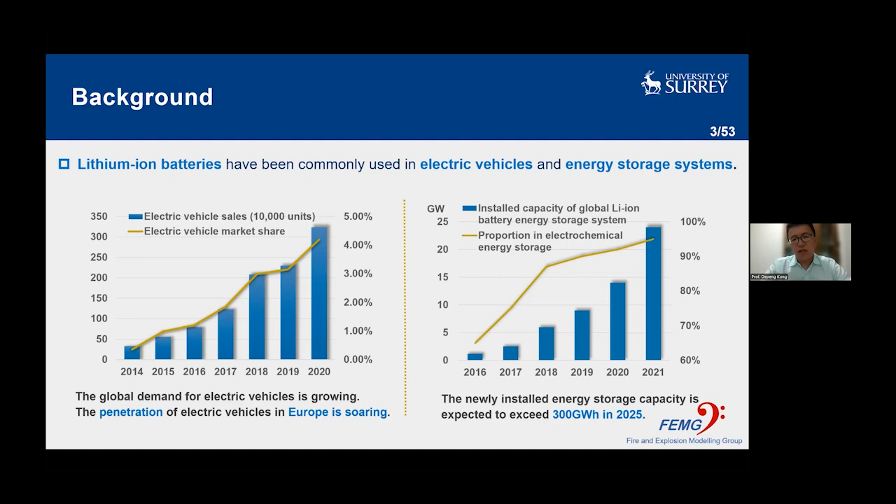However, the safety issues related to lithium batteries are an important part that we cannot ignore. For example, there are some fire and explosion accidents that occur from time to time. Here we give some examples.

For example, for the very famous electric vehicle brand Tesla, the Model S caught fire when it was plugged in at a supercharger station, and the Model S was totally destroyed during the fire. Another accident occurred in Australia in an energy storage station. Because the energy storage station usually uses a lot of lithium batteries, the fire was very large and lasted about 4 days and 4 nights.

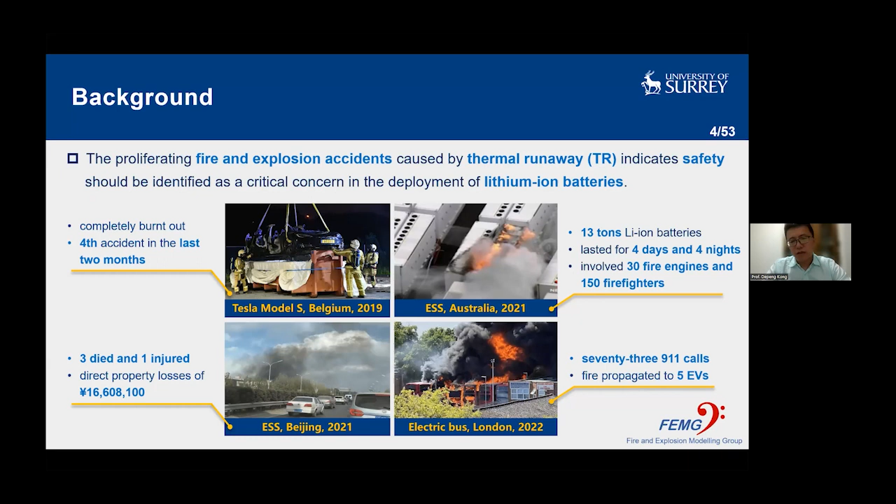It was in an abused condition. For example, if the battery suffers mechanical damage, overheating, or overcharge, it will generate more heat than it can dissipate. As a result, the heat will accumulate and lead to thermal runaway.

Usually, if the lithium battery undergoes thermal runaway, it will experience the process of gas generation, venting, and also jet fire after the thermal runaway. For the venting and fire behaviors, there are two characteristics. First, during the venting process, a large amount of combustible components such as hydrogen, CO, methane, and electrolyte vapor will be released. For the fire behaviors, a large amount of heat will be released from the electrochemical reactions and also the combustion.

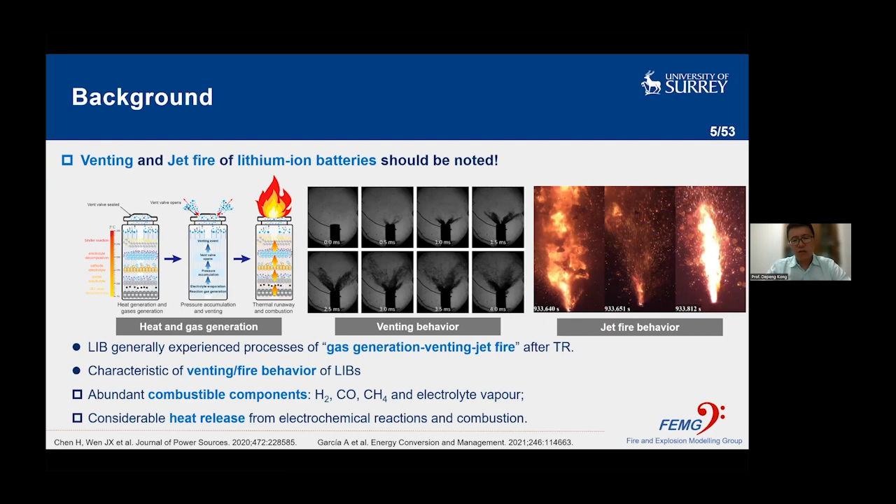Usually, the battery is used in the form of a battery pack or battery module. The heat radiation from a fire will usually accelerate thermal runaway propagation in the battery pack, and the flame of the fire can ignite other components of the pack, causing a more severe consequence. In order to prevent fire, we have to understand the mechanism of thermal runaway and fires.

There are two ways for this goal. First, we can do some experiments. But thermal runaway experiments are very expensive, and they are usually dangerous to the operators. So it is necessary to develop a numerical model to replace the dangerous and expensive thermal runaway tests.

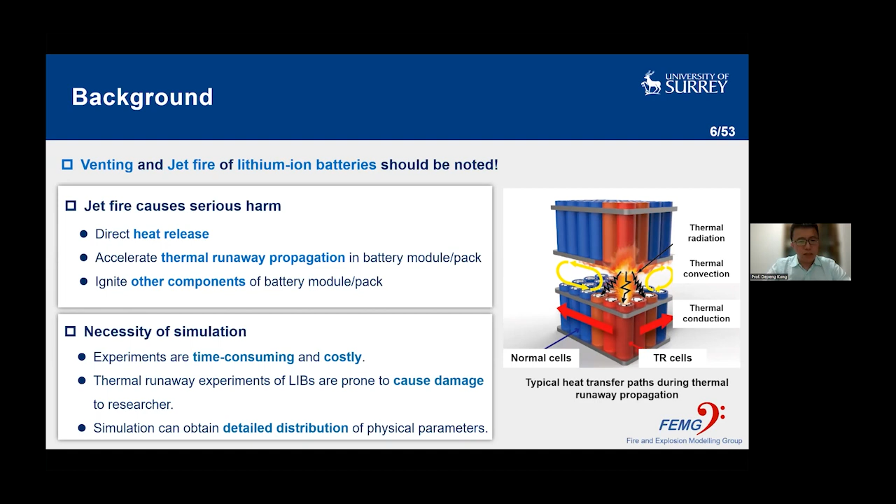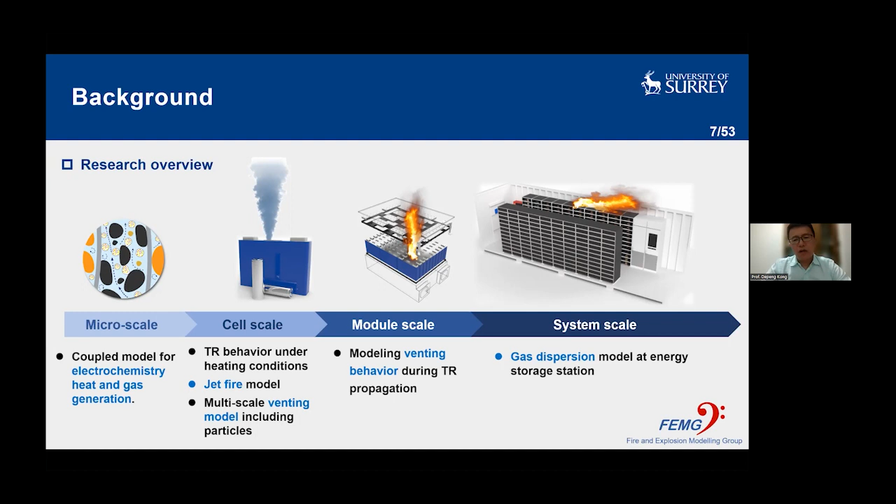In order to achieve this goal, we have developed models to predict thermal runaway behaviors and related safety issues. This model covers from the micro scale, mainly about heat and gas generation, to the cell scale, to predict thermal runaway behaviors, jet fire, and the venting process. We also extend our model to the module scale or even the system scale to predict the gas dispersion process.

Now let's see the first model, that is to predict the thermal runaway under local heating conditions. As we know, thermal abuse is one of the most direct factors, and heating is very common. However, previous work usually focused on oven tests that represent conditions of high ambient temperature with uniform temperature distribution.

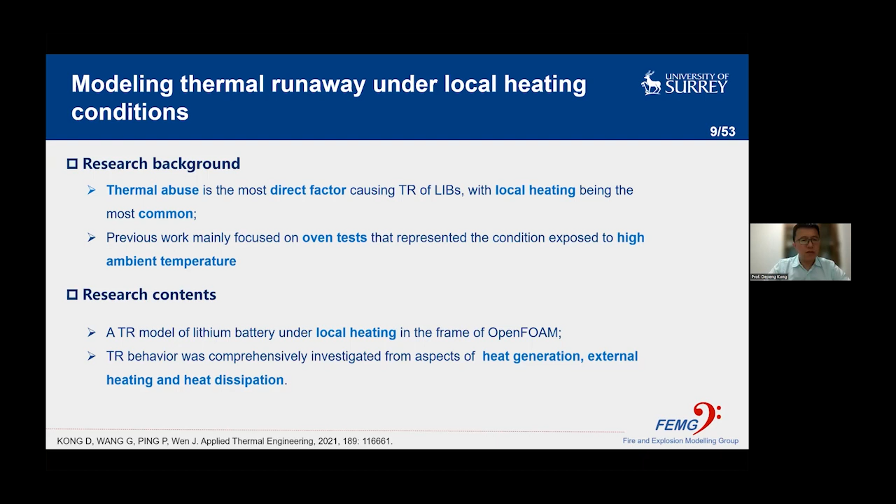In our work, we use the framework of OpenFOAM to develop a thermal runaway model to predict thermal runaway behaviors under local heating. We also use this model to investigate the influence of different factors, such as heat generation, external heating, and heat dissipation conditions.

Here is the model framework. In this model, we use the three-dimension energy conservation equations to get the temperature field for the battery. We also use the lumped model, an Arrhenius equation, to describe the exothermic reactions inside the battery.

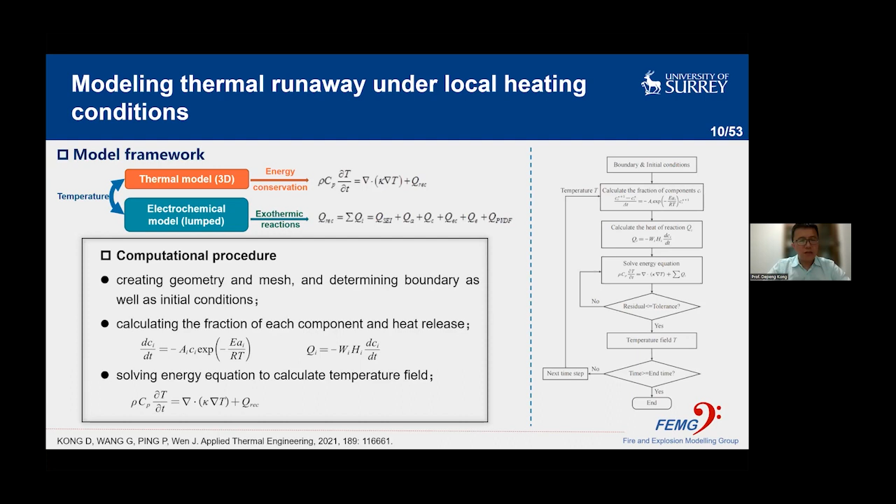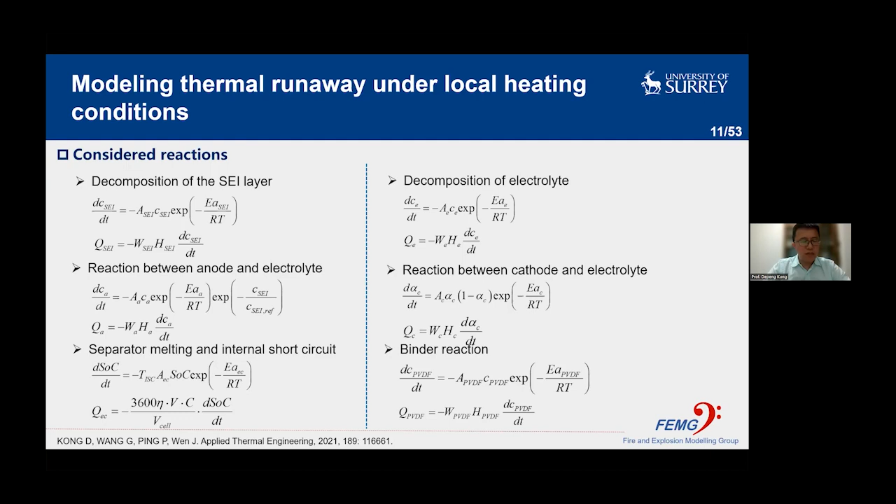For the thermal runaway of the battery cell, the main source of heat generation is from reactions among the battery materials. Here we consider 6 reactions: decomposition of the SEI layer, electrolyte decomposition, reactions among the battery materials such as anode, cathode, and electrolyte, the binder reaction, as well as the separator melting process.

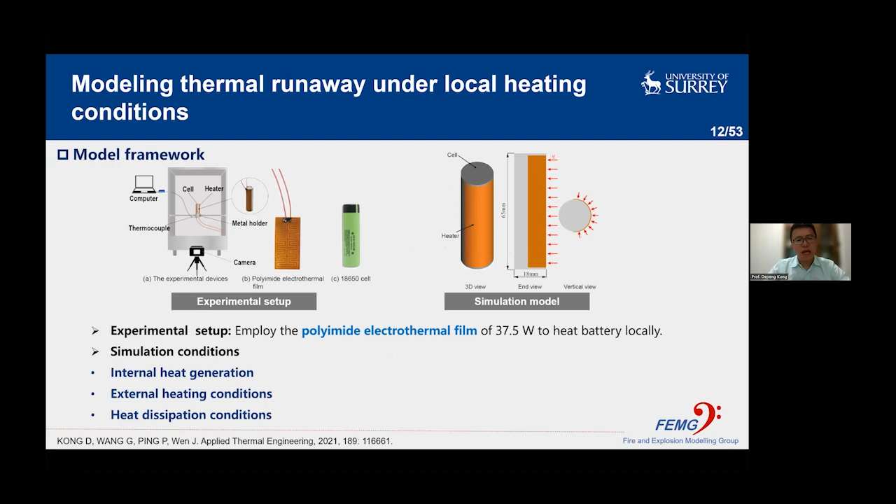Before using the model to make new simulations, we also conducted tests to validate this model. Here we use 3 different kinds of cells for the validation: the LCO cell, NCA cell, and LFP cell. From the results, we can see that our model makes a good prediction of the peak temperature and the onset time of thermal runaway.

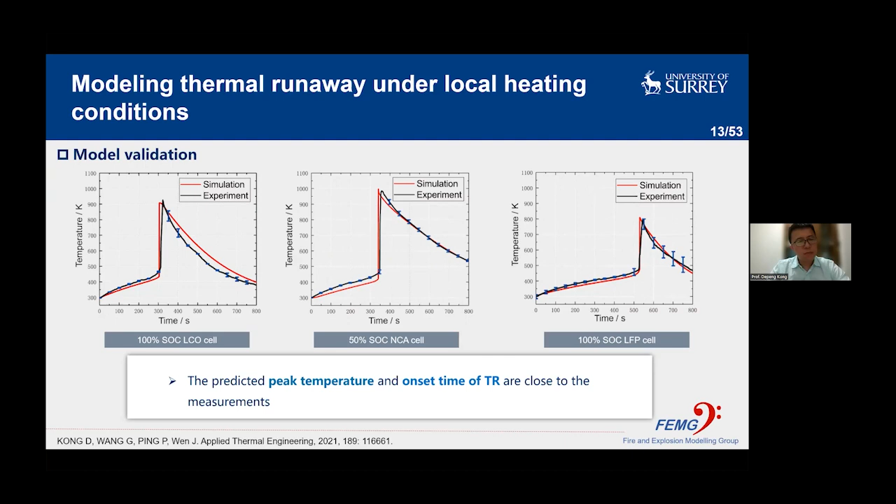After validation, we use the model to investigate the influence of different factors on thermal runaway behavior. The first factor we considered is the battery materials. Here we define 2 indicators to characterize thermal runaway behavior: the first is thermal stability, the onset time of thermal runaway, and the other is thermal safety, the peak temperature of thermal runaway.

From the results, we find that LTO anodes show better thermal safety and stability than graphite anodes. For the cathode materials, LFP shows the best thermal safety and thermal stability. We also find that if we increase the melting point of the separator, the thermal stability of the battery can be improved. The results also suggest that for electrolytes, there is limited effect on thermal safety and thermal stability.

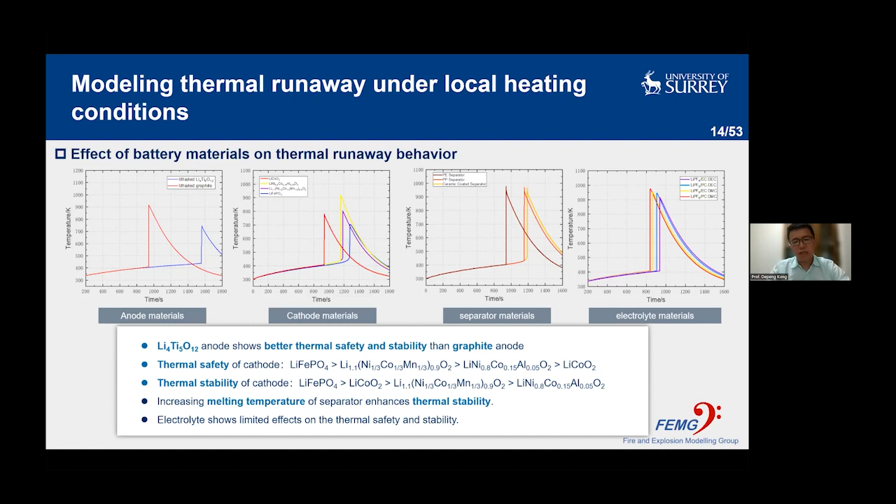The second factor we considered is the local heating position. Here we consider 3 different heating positions: heating at the middle, the end, and the bottom of the battery. The results reveal that thermal runaway occurrence probability is higher if we heat the battery near the bottom, possibly due to the uneven temperature distribution causing poor heat dissipation.

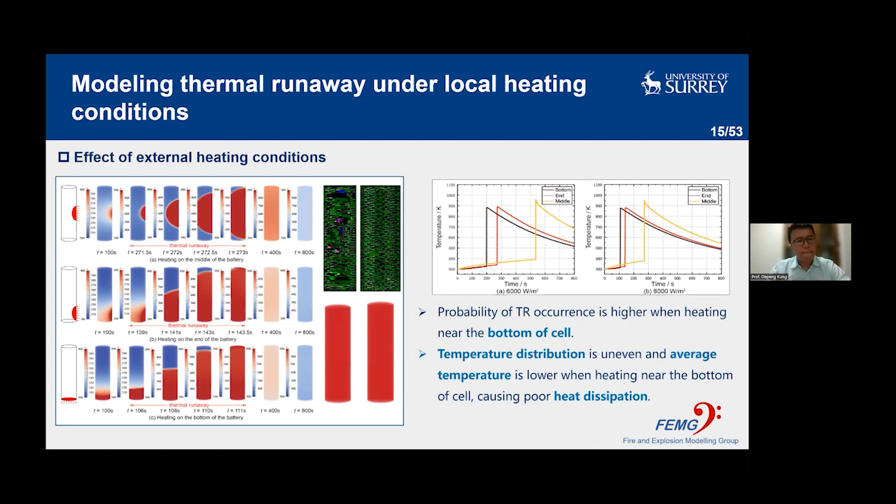The last factor, heat dissipation conditions, is very important for improving the safety of the battery. Here we consider 2 measures for heat dissipation conditions: the first is air speed, the other is ambient temperature.

From the results, we found that if we increase the air speed or reduce the ambient temperature, both can delay the onset time of thermal runaway. If the air speed is large enough or the ambient temperature difference is large enough, these two measures can even inhibit thermal runaway. However, both have little influence on reducing the peak temperature, so both are only effective in improving thermal stability.

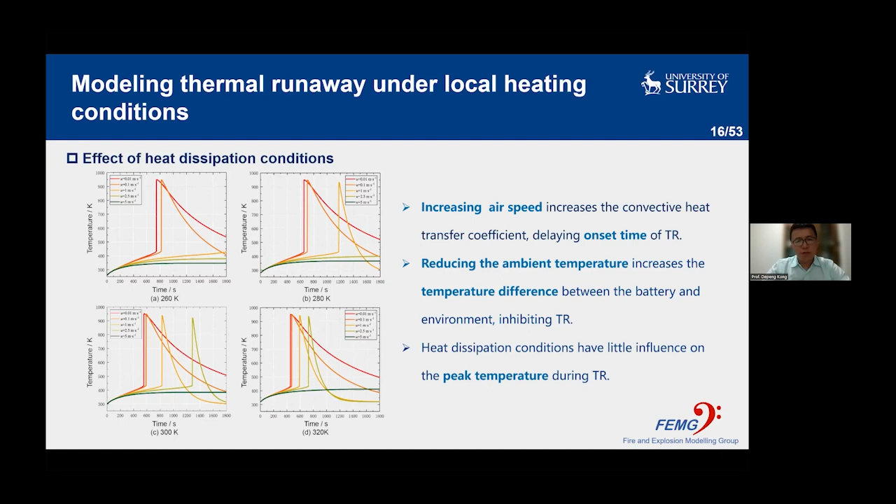The second model is about predicting the particle and gas venting during the thermal runaway. As we know, during the thermal runaway, the venting process is very important.

During the venting process, some combustible gases such as hydrogen, CO, and methane will be released from the broken safety valve. In addition to the combustible gases, some solid particles such as melting materials are also ejected. Because the solid particles usually have a very high temperature and also a very high velocity, these solid particles may serve as a medium for igniting the gases and lead to fire propagation.

However, in previous studies about the venting process, they usually considered the gas venting and neglected to focus on the solid particle venting process.

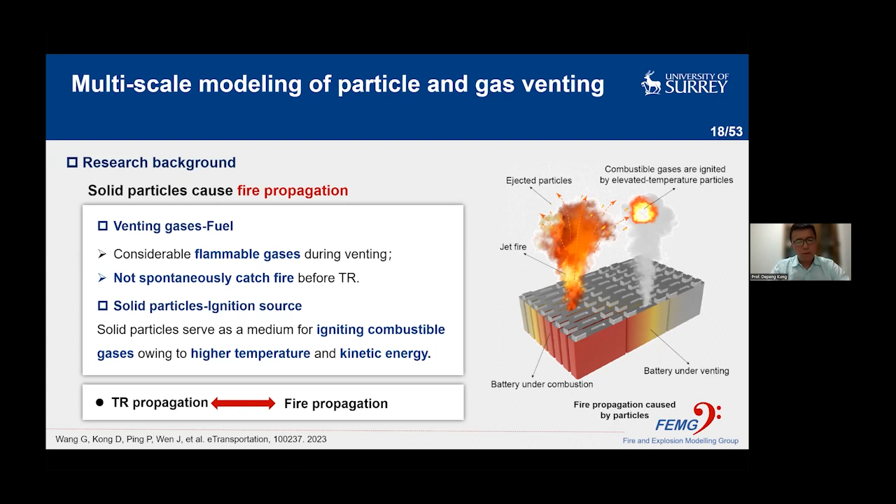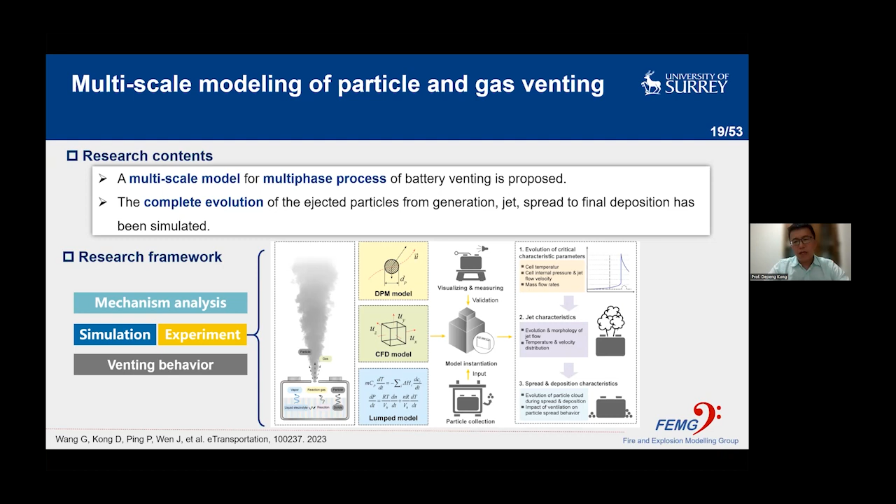In our work, we have proposed a multi-scale model for the gas and particle venting process. This model can reveal the complete evolution of the ejected particles, from their generation, jet, spread, to the final deposition - the whole process.

Before we develop the mechanism of the lithium battery venting process, the venting process is actually very complex. It is a combined action of chemical reactions and also physical transformation.

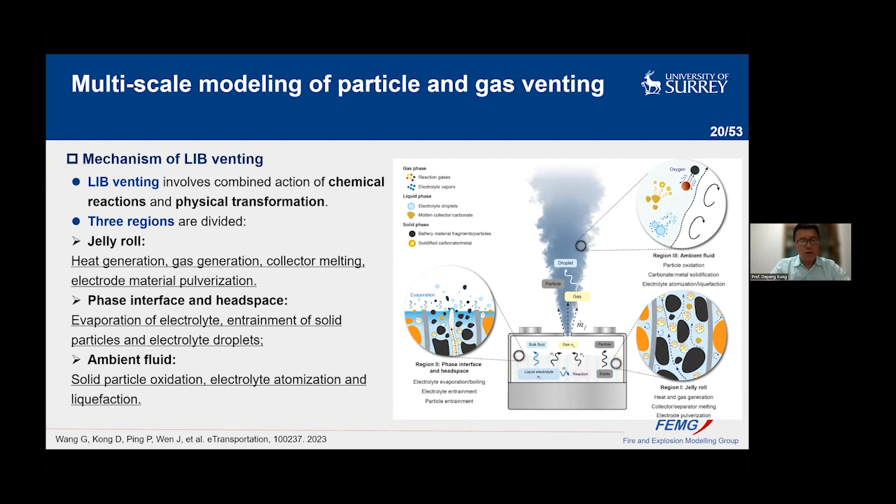Here, we divide the simulation into 3 regions: the jelly roll, which is inside of the battery; the phase interface and headspace region, which is also inside of the battery, above the jelly roll region; and the ambient fluid, which is outside the battery.

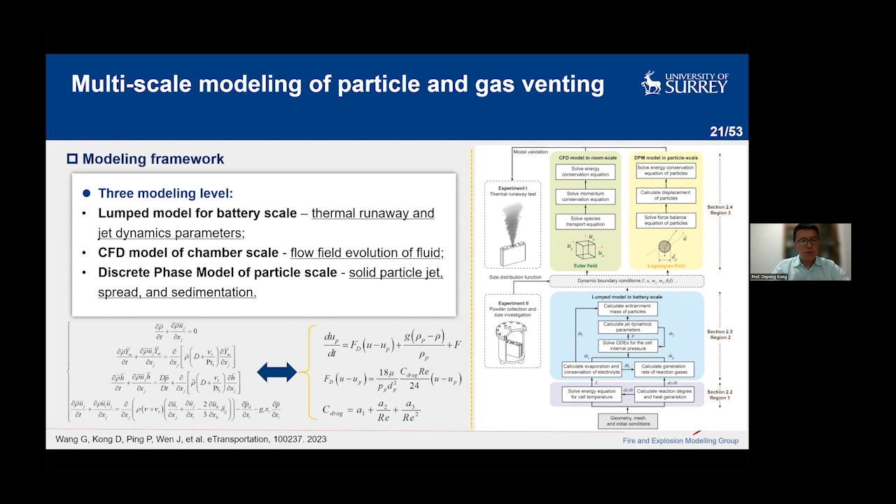Then we consider 3 levels for the modeling. For the battery scale, we use a lumped model to predict the thermal runaway and jet dynamics parameters. At the chamber scale, we use a CFD model to predict the fluid flow evolution outside the battery. And we also use a DPM model at the particle scale to predict the solid particle jet spread and sedimentation process.

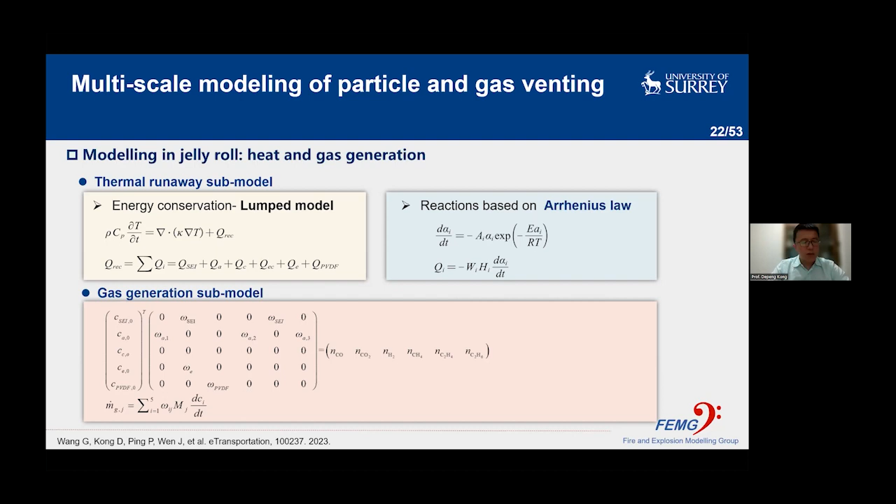Let's see the modeling at the jelly roll region. In this region, the main contribution to the venting and thermal runaway process is that it will generate heat and gas. So we use the Arrhenius equation to describe the thermal runaway progress. In addition to the heat generation, this process also generates some gases, and we use a matrix to describe the gas generation for every reaction.

For the phase interface and headspace region, there are 2 processes that we have to consider. The first one is the evaporation, and also the particle entrainment. For the electrolytes, we consider the phase change: the first one is the reaction consumption, and the other one is the electrolyte vaporization process.

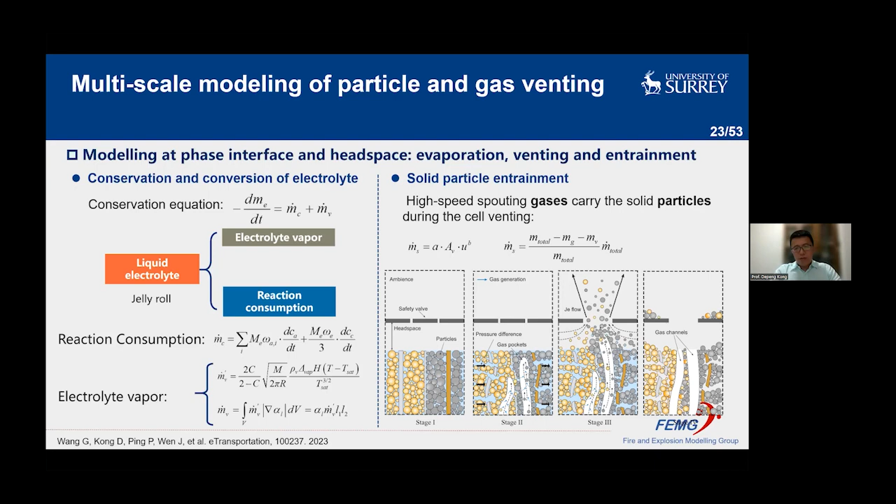For the solid particle entrainment, we consider this process as gases carrying the solid particles during cell venting.

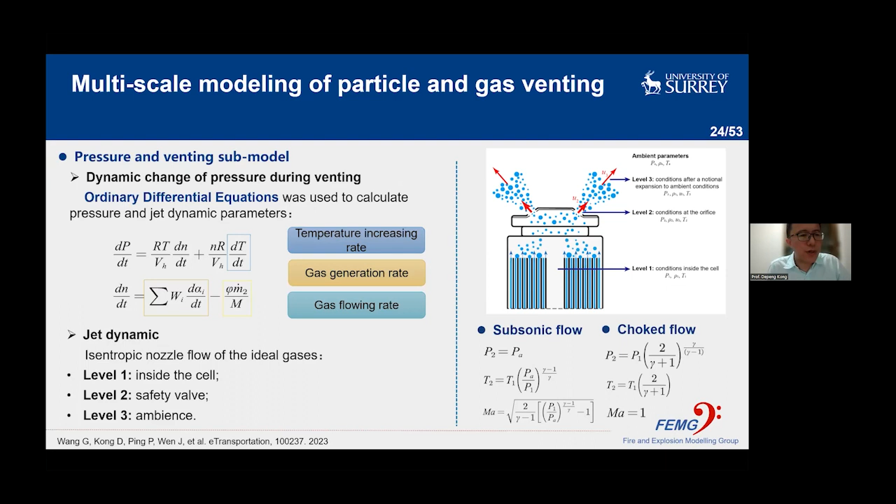After the particles and gas are ejected out of the battery, we have to consider the change of pressure in the venting process. So we use ordinary differential equations to calculate the pressure and jet dynamic parameter changes.

For the ambient region, we usually consider the gas flow and particle transport. For the gas phase model, we use a CFD model based on the FVM method to predict the gas flow fluid. And for the solid phase particles, we use a DPM model to predict the motion trajectory of the particles.

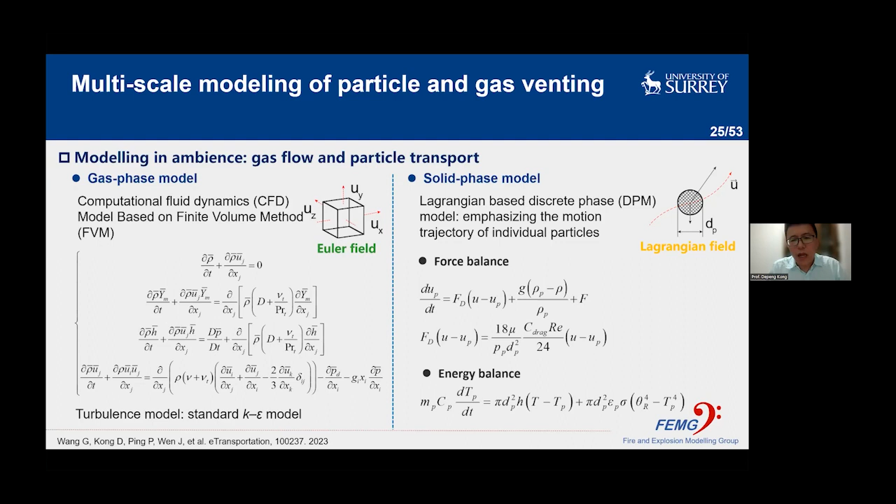We also made some tests to validate our model. Here we use PLS to visualize the ejected particles and gas flow. We also measured the mass loss and jet velocity using an electronic balance and a pitot tube.

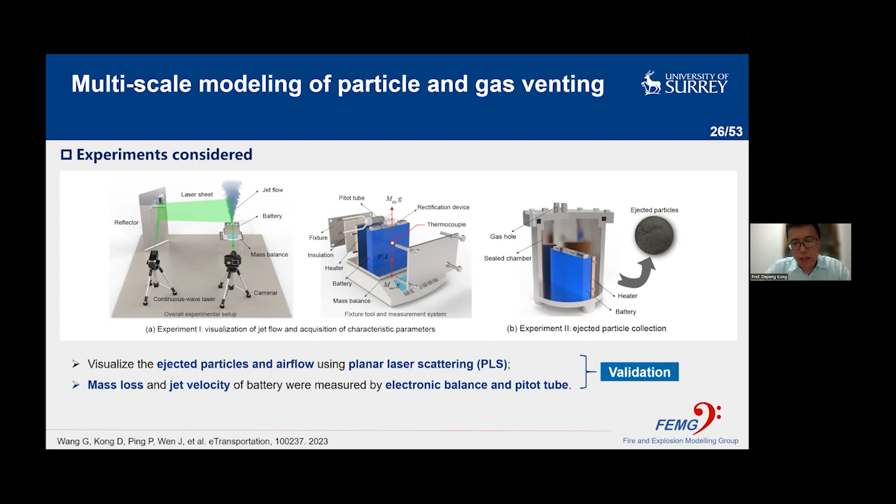In addition to these measurements, we also used SEM to observe the surface of the particles and made a statistical analysis for the size distribution of the solid particles. We found that there are two peaks for the size distribution.

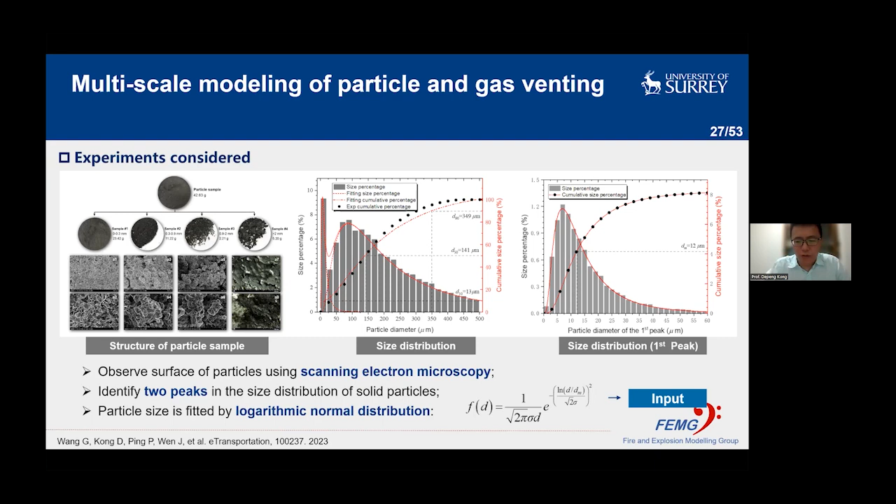Then we used log-normal distribution functions to fit the particle size, and the fitted function was used as the input of the model. Here are the simulation and boundary conditions for our model.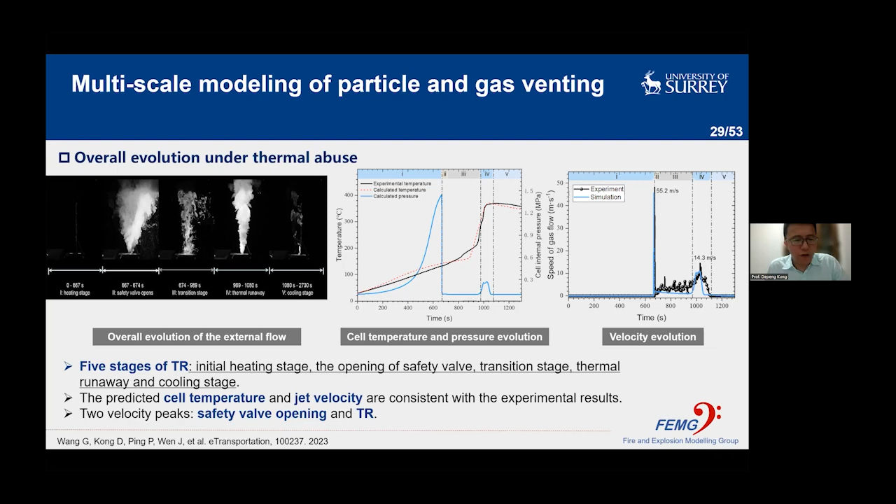Then we compared the results from the tests and also from the simulation. From the results, we can see that the predicted cell temperature and also the jet velocity are consistent with the test results. In addition, this model can also identify two velocity peaks that occur at the safety valve opening and also during the thermal runaway progress.

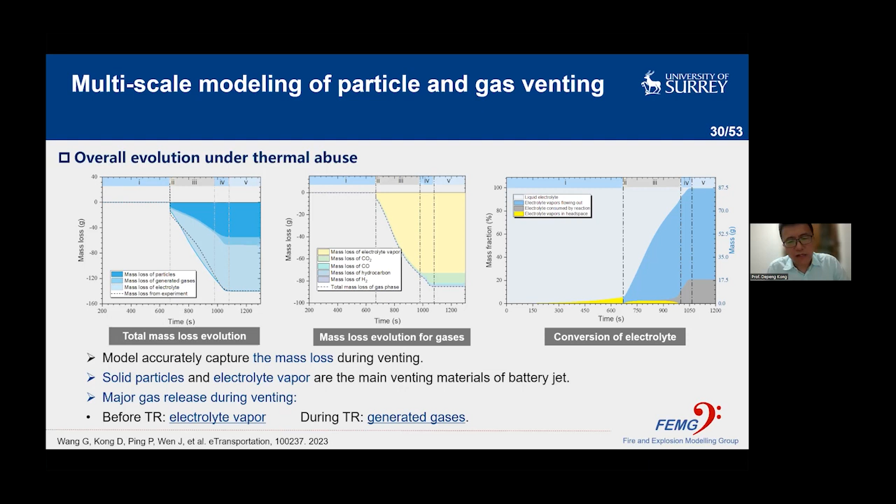This model can also reveal the mass loss evolution. From the results, we found that the solid particles and the electrolyte vapor are the main venting materials of the battery jet. We also found that the major gas release during venting is different before and during thermal runaway. Before thermal runaway, the main component is electrolyte vapor, and during thermal runaway, it is the generated gas due to the reactions.

We also compared the jet geometry characteristics, comparing the angle of the jet and also the radius of the jet. From the comparison, we found that the predicted angle and radius are consistent with the experimental results.

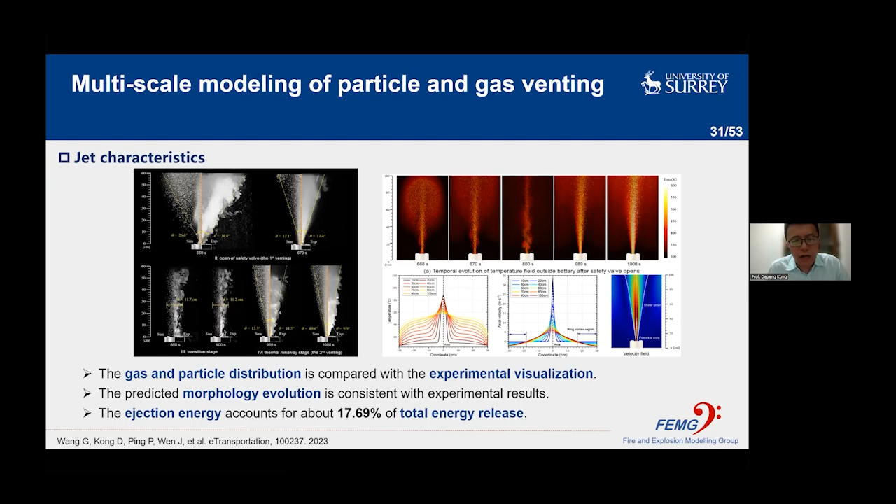This model can also be used to predict the spread and deposition of the generated particles. We also used this model to investigate the influence of ventilation on the particle mass. From this, we can see that the proposed model can reveal the entire chain of the venting phenomena, from the jet spread to the final deposition.

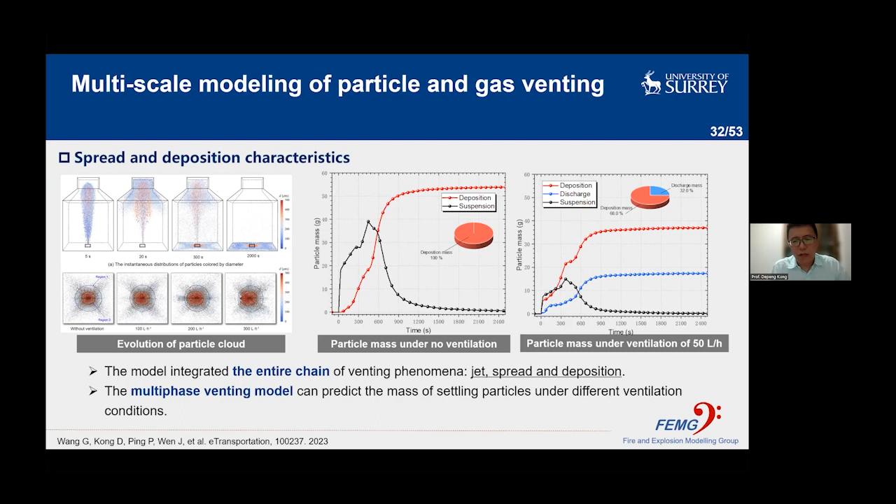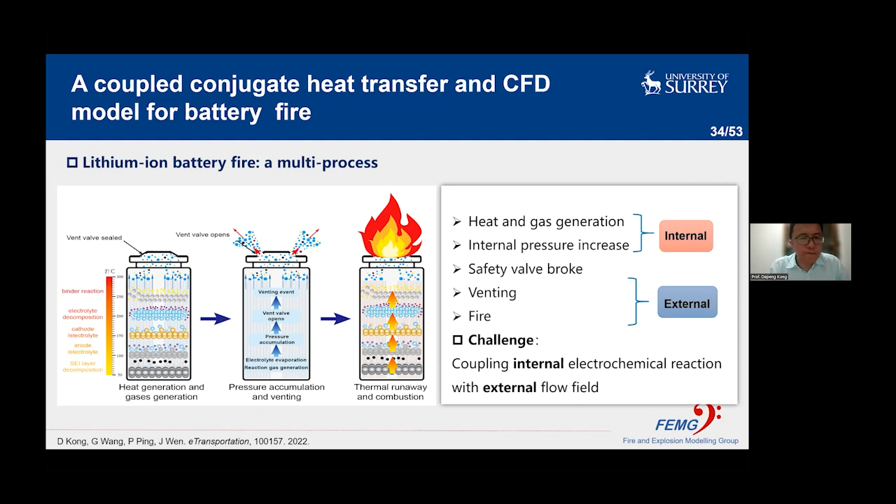The third model we developed is a model to predict the jet fire of the battery. The battery fire is very different from hydrocarbon fuel fire, because the causes of the fire are usually related to the internal electrochemical reactions inside the battery, and outside the battery there is also a flow field. So if we want to model the battery fire, we have to couple the internal electrochemical reactions with the external flow field. Here we developed a model based on solid and fluid heat transfer.

This model includes several sub-models. The first is the thermal runaway model, which uses a series of Arrhenius equations to predict thermal runaway. We also use ODEs, ordinary differential equations, to predict the pressure and venting process. For the outside of the battery, we use the RANS model to describe the turbulence process, and the EDC model to describe the combustion. In order to couple these models, we use dynamic boundary conditions to accompany them.

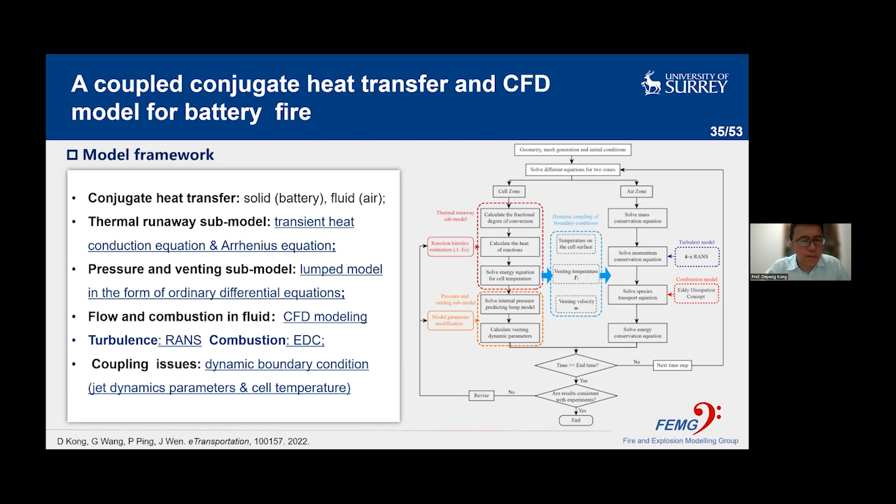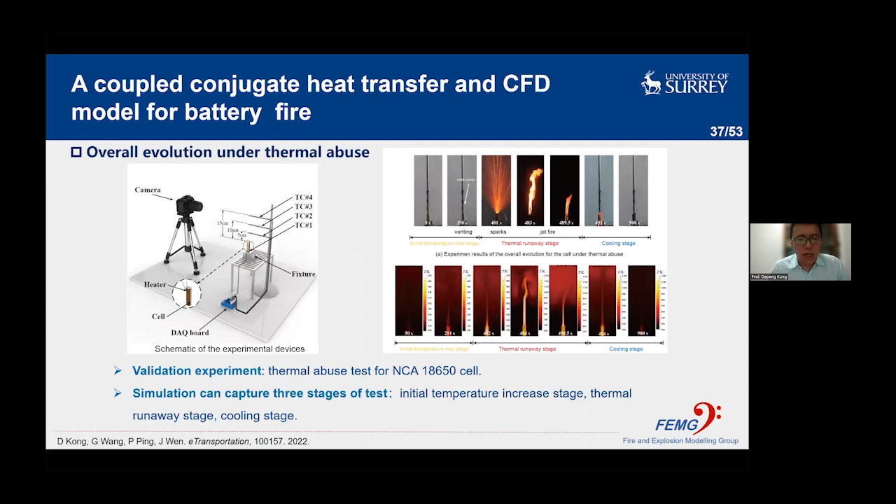We also used this model to run a simulation for a cylindrical NCA cell. Before doing the simulation, we also made some validation experiments for the NCA cylinder cells. Here are the compared results from the tests and the simulation.

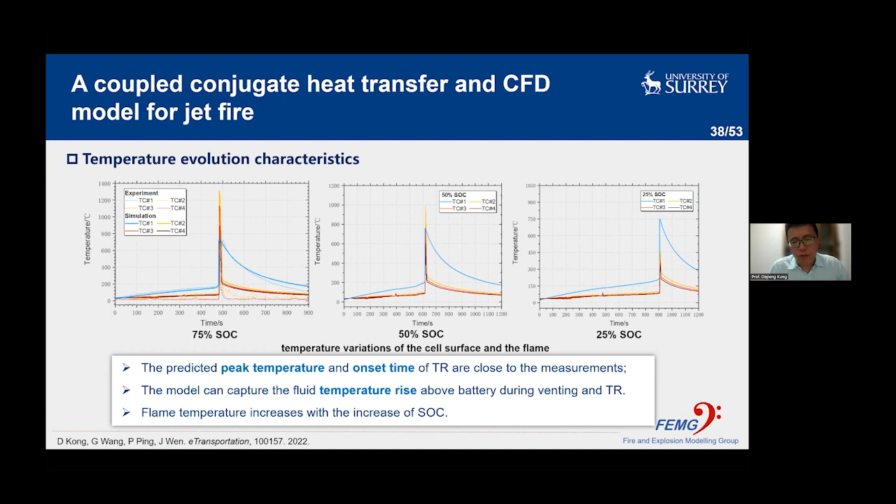From the results, we can find that the model can predict the peak temperature and onset time of the thermal runaway very well. Also, this model can capture the fluid temperature rise above the battery during the venting and thermal runaway process.

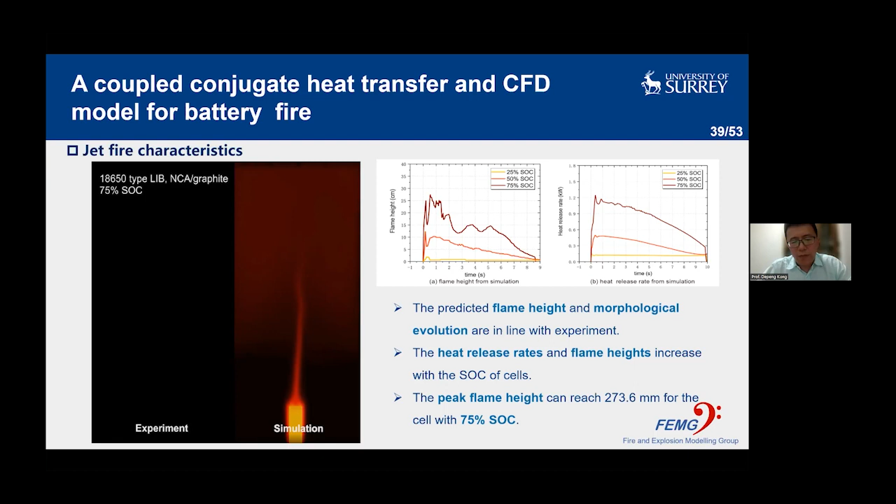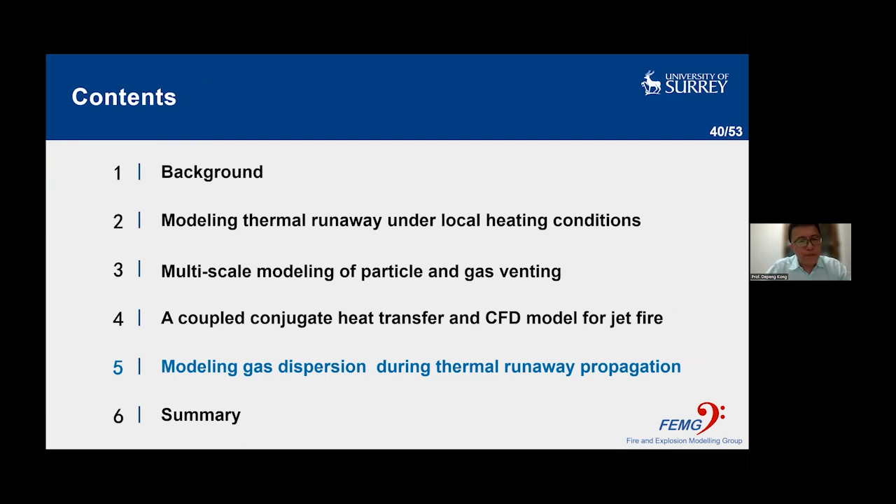These three models are at the cell level, and now let's see the last model, which is at the system level. In practical application, batteries are usually used in the form of a battery pack or battery module. If one battery undergoes thermal runaway, the thermal runaway may propagate from one cell to another.

During thermal runaway propagation, a lot of combustible gas is generated. As a result, the gas will accumulate and disperse, even causing explosion in a confined or semi-confined space. For example, in 2021, there was an explosion accident at an energy storage station in Beijing. So it is very important to predict the gas dispersion behavior during thermal runaway propagation.

To develop this model, there are two challenges. The first is how to couple thermal runaway propagation with the venting process. The second is how to balance model accuracy and calculation time, because we can use CFD models to fully simulate the thermal runaway behaviors, but this requires very high computational resources. In practical application, that is not feasible. So we have to balance accuracy and effectiveness.

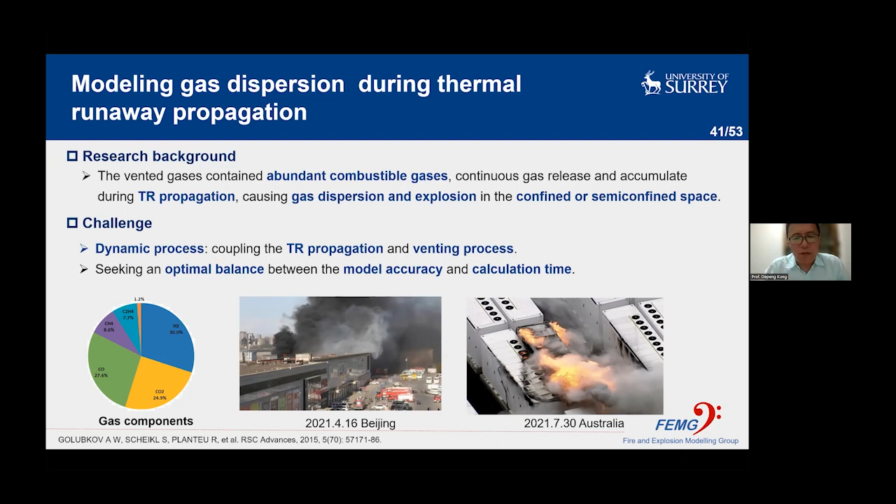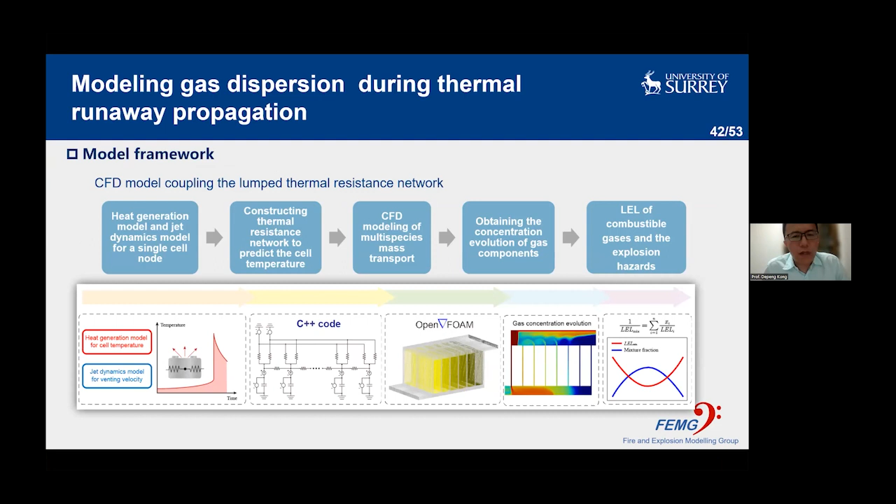Here we developed a model that couples a CFD model with a lumped thermal resistance network. This is the framework of the model. In this model, we considered the battery as a node, and these nodes are connected according to the battery arrangement. For heat transfer, we considered three pathways: heat conduction between battery and wall, and convection between air and the batteries.

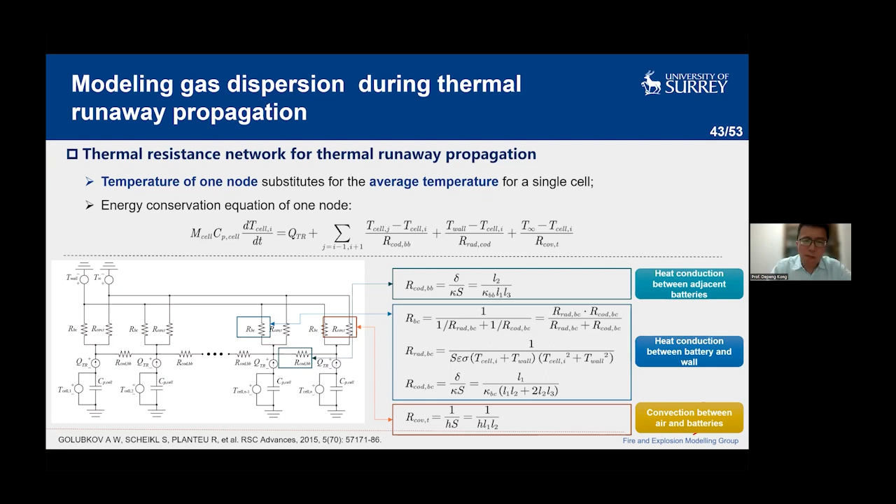The thermal resistance network is used to predict the sequence of thermal runaway propagation. For the gas dispersion process, we use a CFD model to predict it, and we also calculate the lower explosion limit for the venting gas mixture to determine the explosion risk for the gas.

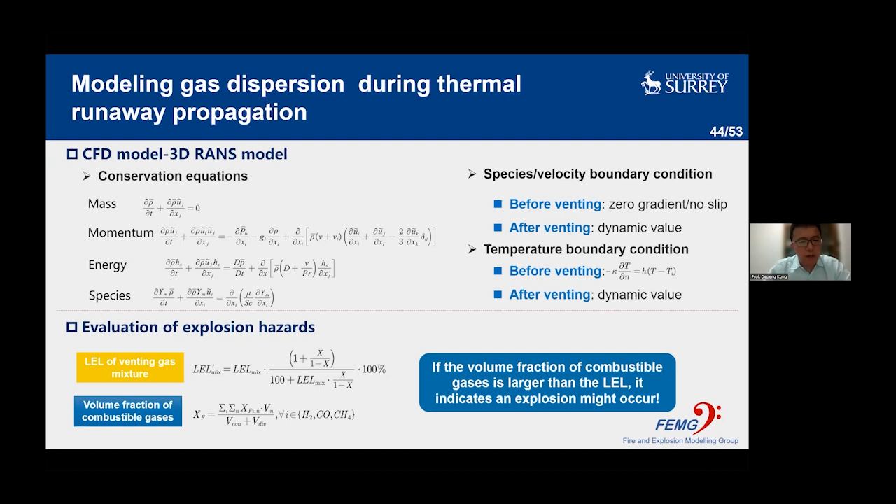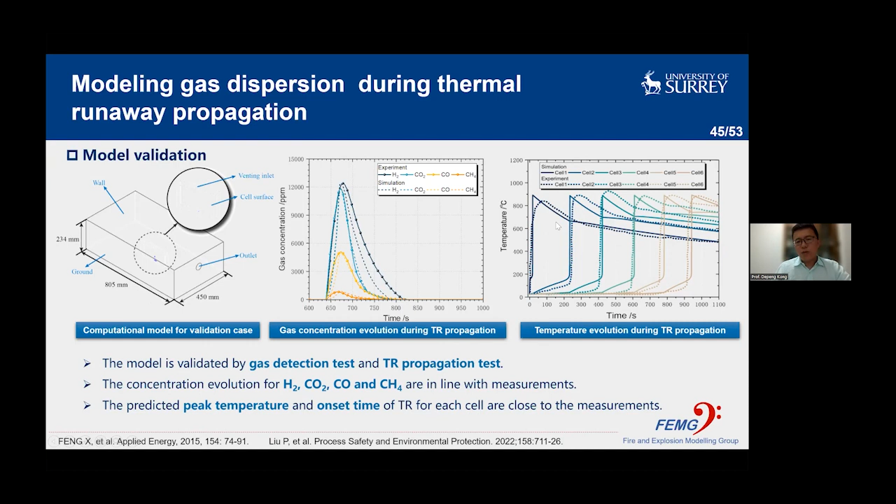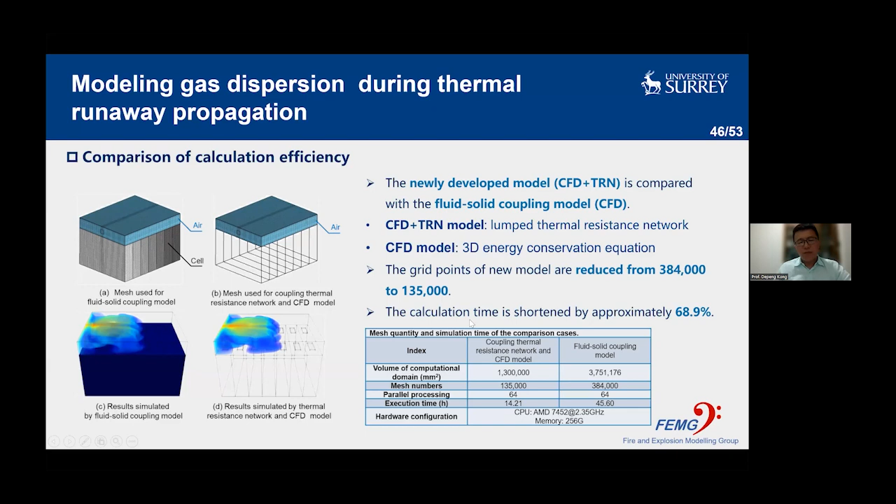We also compared the calculation efficiency using the same scenario in two ways. The first is the CFD plus TRN model, and we also used the complete CFD model to predict the same scenario. From the results, we can see that the CFD plus TRN model can reduce the grid points, and correspondingly, the calculation time is shortened greatly.

Then we used the model to investigate the effects of different factors on the gas diffusion behavior. For example, we investigated the void volume's effect on gas diffusion. From the simulation results, we find that the model can capture the sequential venting behavior during thermal runaway propagation, and we can also find the periodic evolution of gas concentrations. The reason may lie in the discontinuous nature of the venting process.

We also found that the void volumes of the battery pack have little influence on the explosion risk after thermal runaway.

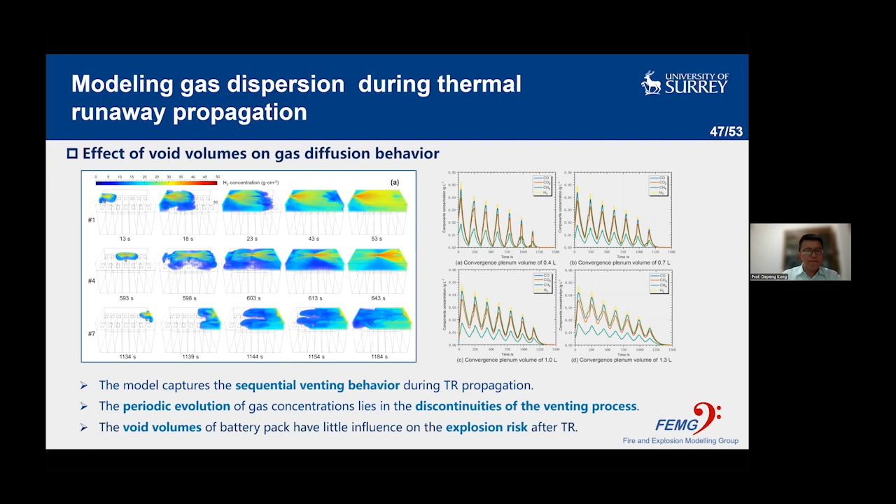As mentioned before, this model can make a good balance of accuracy and computational effectiveness, so we can extend this model to a larger scale. For example, as shown in the animation, this is gas dispersion in an energy storage station. This model can be used to evaluate the gas explosion risk for the energy storage station.

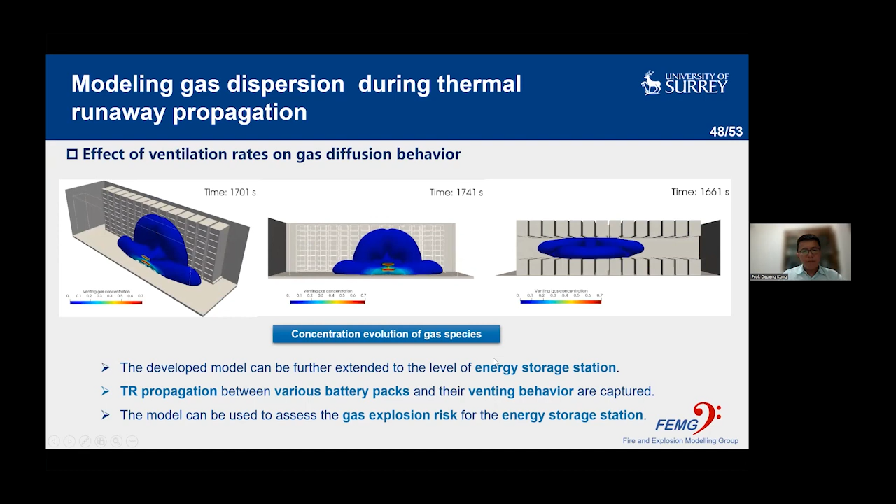Okay, the final part is the summary. This is the conclusion from the talk, I will not repeat it again.

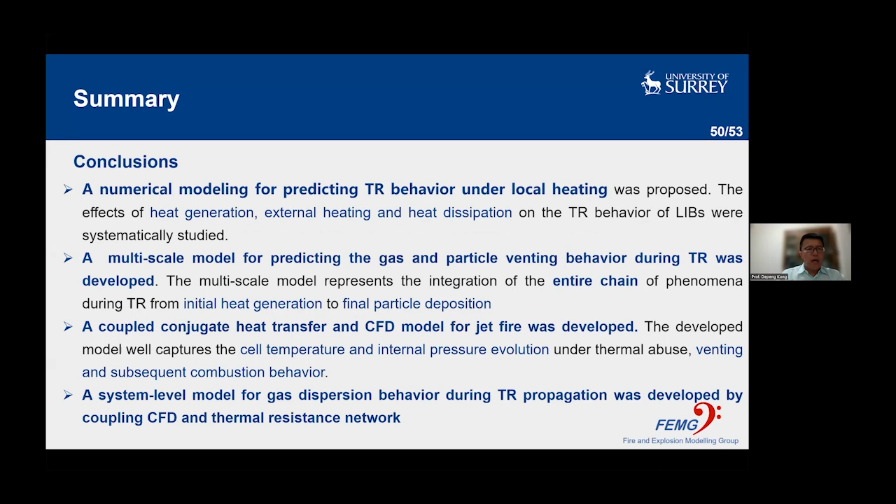For future work, I think we will focus on understanding the gas generation mechanism. The second one is to incorporate more physical fields in the modeling to make a more realistic thermal runaway behavior prediction.

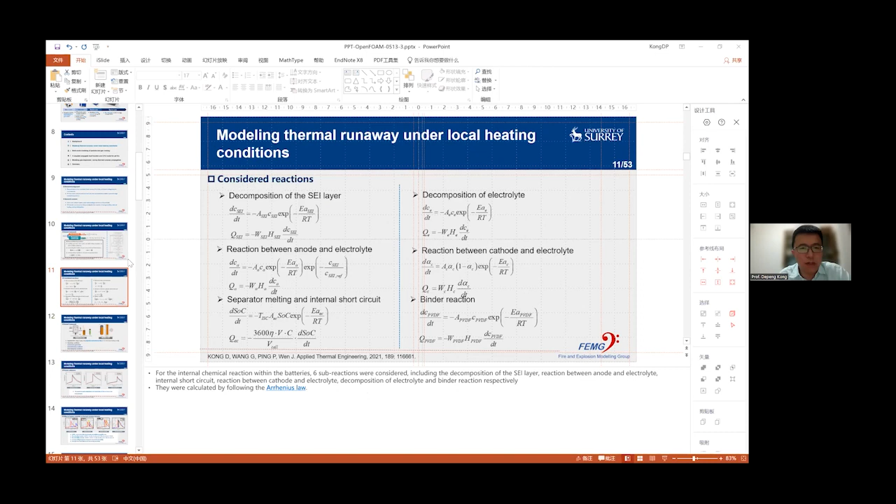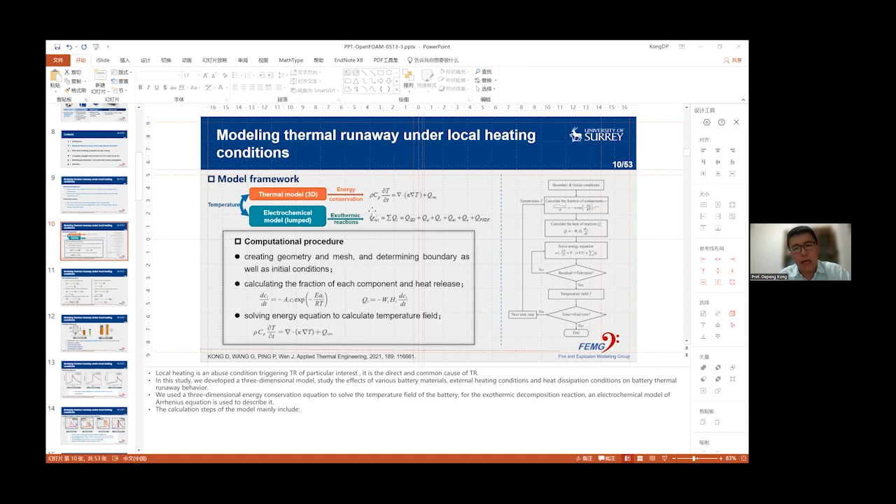So how to make sure of the thermal runaway temperature: for the test, we usually use a thermocouple attached to the battery to get the temperature change. And for the modeling, we use this equation to get the temperature change, so by this equation we can get the temperature field, then we can get the temperature change, like this.

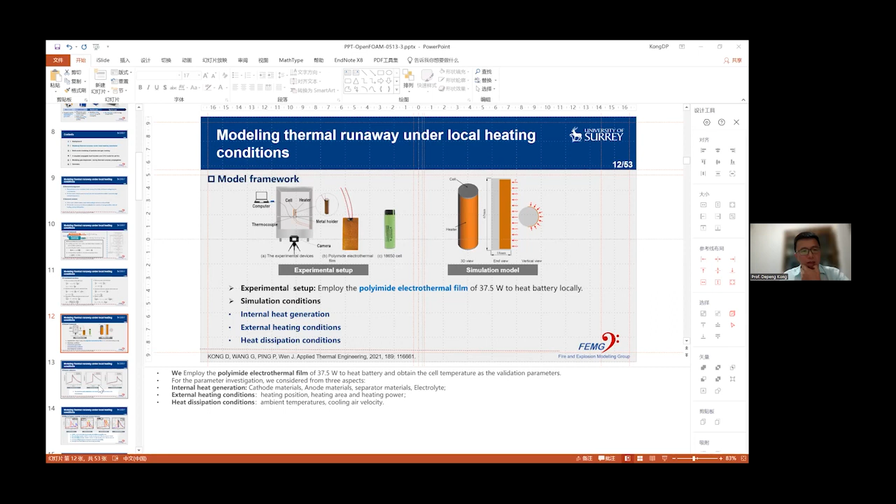In addition to the battery materials, maybe some abuse conditions also have influence on the thermal runaway behaviors. So in the future, maybe we will focus on different abuse condition simulations.

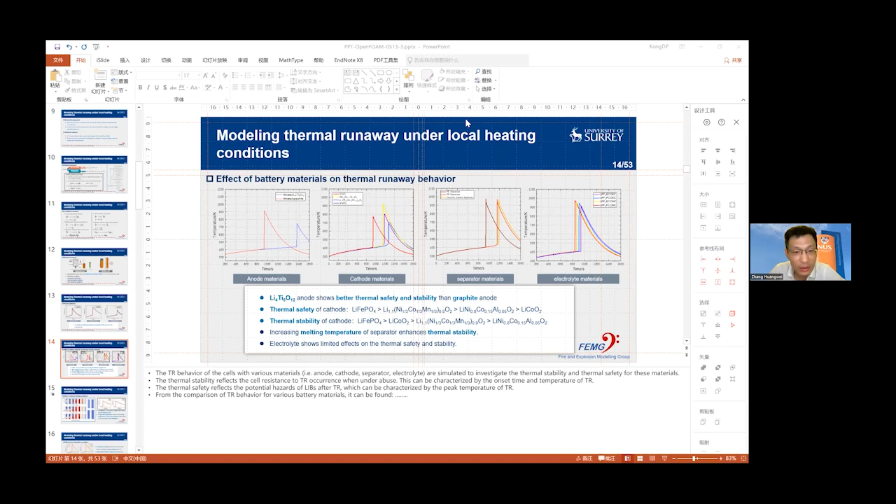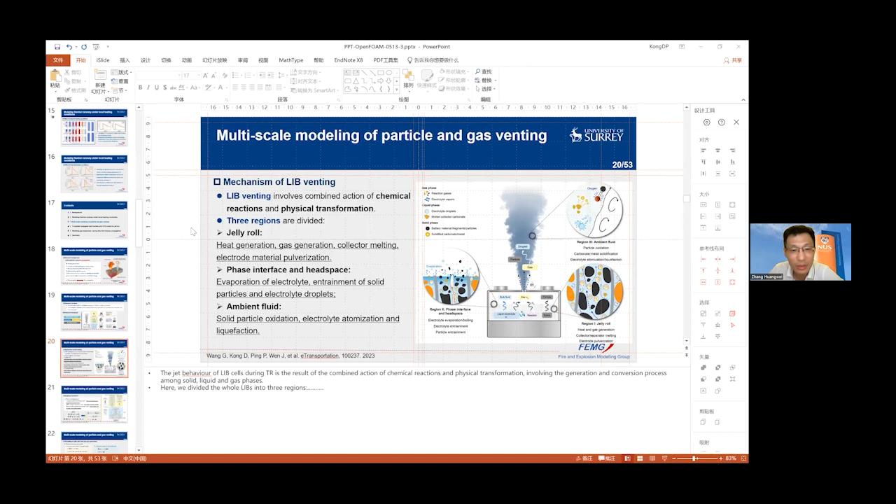Yeah, this is the question from the audience. For this question, we determined the solid particles based on the literature, and we determined some particles have occurred during the process, but we didn't consider the generation of the solid particles. So we just simulate the particle jet and its spread outside the battery. We didn't consider the generation of the solid particles.

Okay, so actually a follow-up question, because here we are talking about gas venting, right? So normally the gas composition from the battery probably will be very different, considering different battery materials and also SOC and so on. So in the modeling, how did you determine the gas composition? And another one, once we have a mixture of different fuels in the vent gas, how can we determine a good chemical mechanism to model the combustion process of the venting gas?

Yeah, that's a very good question, and we agree with your comment. There will be different gas compositions for different chemical systems. But we can also find some studies about the gas composition in the existing literature. So in our work, we get the composition from the literature, then we use this composition as an input for our model. Also, if we continue this work, we may have to understand the mechanism of gas generation for different chemical systems for the battery.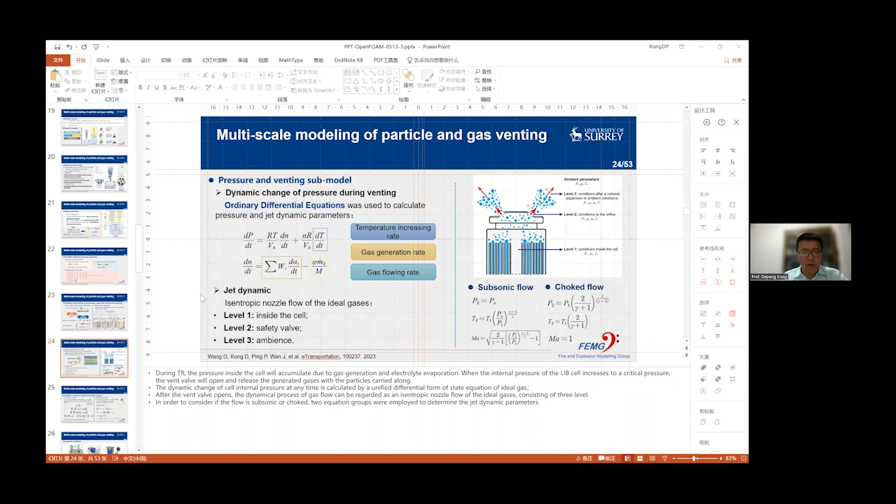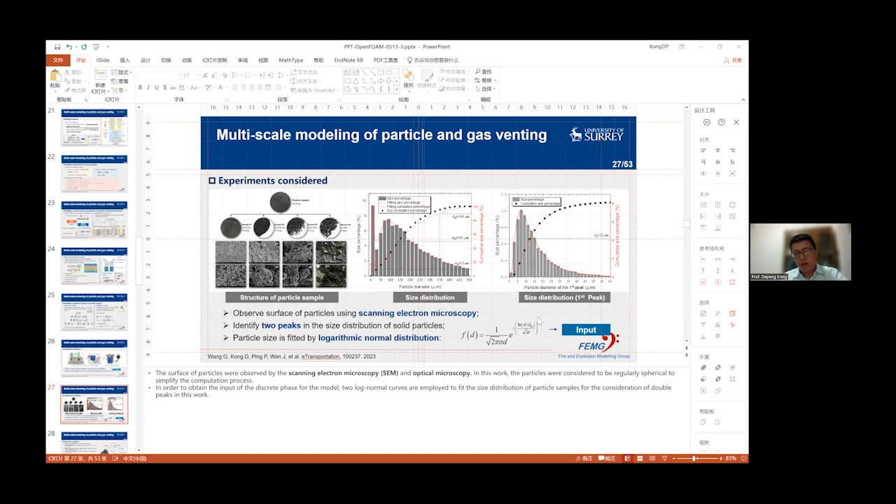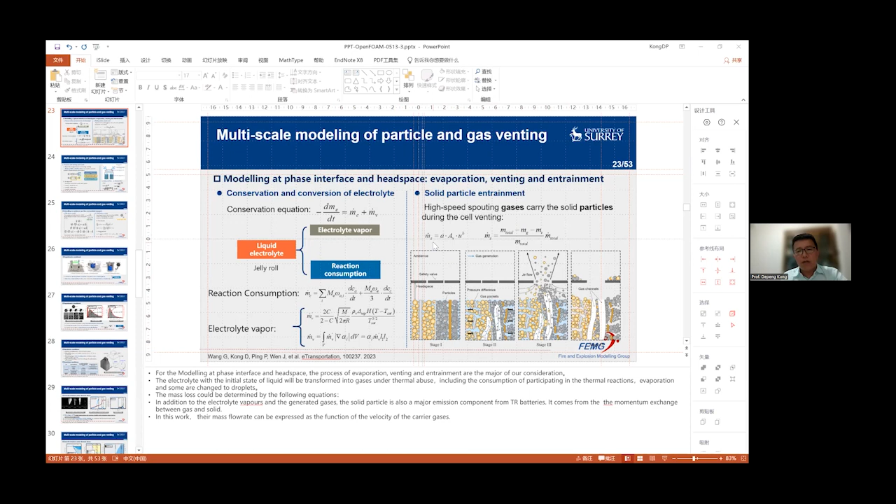For the particle size, as shown in these slides, we made a statistical analysis of the size distribution, and then we made a fitting. We used the log-normal distribution to fit the distribution, and then we put the distribution function as the input for the model. And for the ejection, we use this equation to model the solid mass loss, and use the DPM model to predict the motion trajectory of the particles' movement.